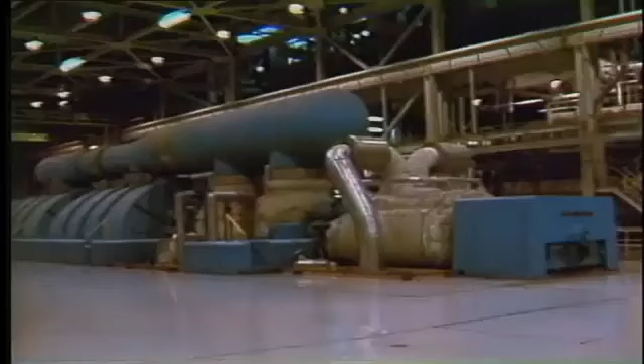So far in this program on steam power, we have examined steam production and the different types of boilers and fossil fuels which are used for this purpose. We are now going to shift the focus onto steam utilization by taking a detailed look at the steam turbine which drives the electrical generator.

We already studied the various turbine cycles and factors affecting efficiency at the beginning of this program. In this module, we'll look at the main features of turbine construction, including the various components and support systems such as gland steam, lube and hydraulic oil, and the condenser. The subject of turbine operation, control, and protection will be dealt with in the next module.

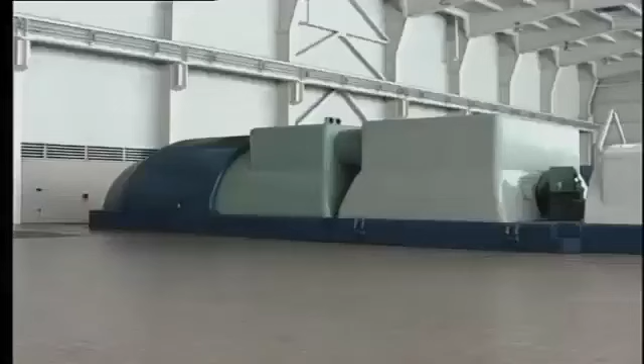The steam turbine is certainly one of the most popular prime movers, especially for driving large power generators. The size of steam turbines built and installed runs all the way from about 5 megawatts up to 1,000 megawatts or more. So what is it that makes the steam turbine the preferred prime mover in comparison with, say, the diesel engine? Well, there are quite a number of advantages, the main factor being that of physical size.

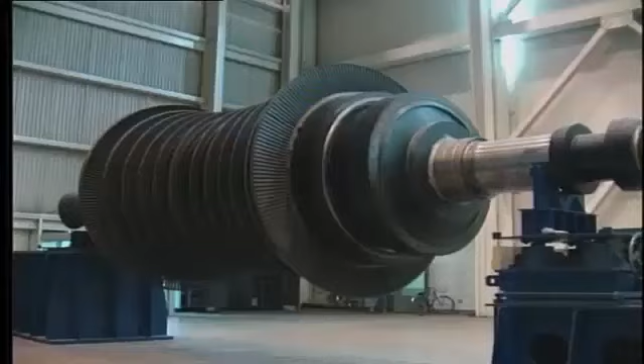For example, a 30-megawatt steam turbine is probably smaller than a 5-megawatt diesel. Another advantage is that the steam turbine is far less complicated and contains very few moving parts. The moving parts are the rotor, which drives the generator, and the steam control valves and control gear.

The amount of vibration produced by a steam turbine generator and transmitted to the surrounding area is relatively low, provided, of course, that the machine is in good condition and is correctly installed and aligned. This makes for a quieter operating plant, particularly when compared with the diesel engine or even the gas turbine.

The steam turbine runs at high speed, usually 3,600 RPM in North America or 3,000 RPM in Europe, and can therefore be coupled directly to a two-pole generator. Remembering that the diesel engine operates at around 200 RPM, we can see one of the reasons why the specific output of the steam turbine is much greater.

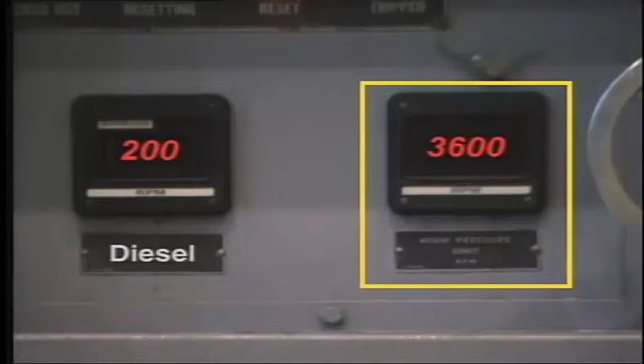One other advantageous factor is the relative ease of controlling the output of the steam turbine. This is achieved simply by adjusting the amount of steam admitted to and flowing through the turbine. As we'll see later, admission valves, also known as control valves, are installed for this purpose.

The turbine stop valve, or valves, is located upstream of the control valves. In case of an emergency, the stop valve closes automatically, cutting off all steam supply to the turbine and bringing the machine to a halt.

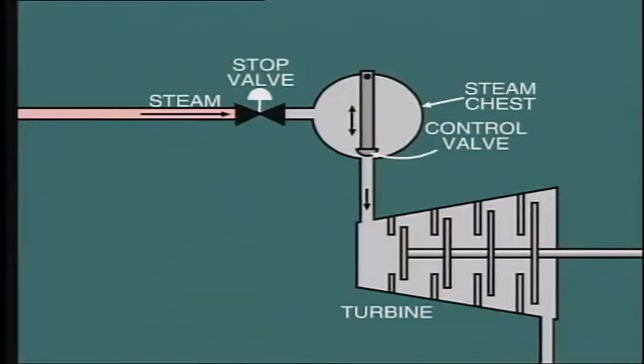The support bearings are allowed restricted movement in the axial plane to cope with expansion of the turbine, as we shall see later.

The turbine rotor is directly coupled to the generator rotor to transfer the mechanical energy produced in the turbine to the generator, where it is converted into electrical energy.

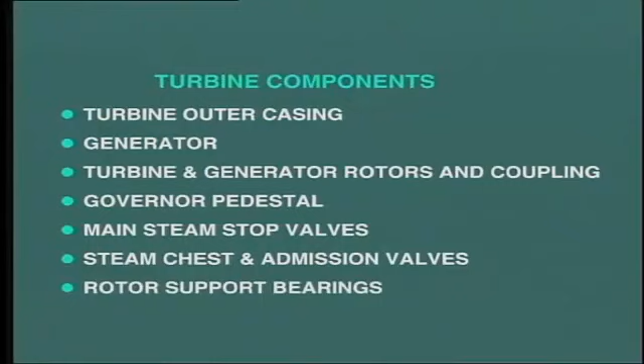Make sure that you know where the following components are located on your particular turbines: the turbine outer casing, the generator, the turbine rotor, the generator rotor, and the associated coupling, the governor pedestal, the main steam stop valves, the steam chest and associated admission valves or control valves, the location of bearings which support the turbine rotor.

Now, the particular machine that we've been studying is made up of several cylinders, and we'll be looking at other cylinder arrangements in a moment.

But first, let's take a closer look at a single cylinder machine in order to help us understand the principles of turbine operation, how it actually functions and produces power.

As we all know, steam at high pressure and temperature, say 1800 psia and 1000 degrees Fahrenheit, is admitted at one end of the turbine.

After passing through the turbine, this steam exits at a much lower pressure and temperature, say 50 psia and 250 degrees Fahrenheit for a typical back pressure turbine.

However, if the turbine is of the condensing type, and this is far more common, then the steam exiting from the turbine will be at a pressure far below atmospheric, say 1 psia, and at a temperature of about 100 degrees Fahrenheit. Clearly, the amount of energy in the steam exhausted from the turbine is much less than in the steam entering the turbine.

The heat energy has been used to force the turbine rotor to rotate at high speed and consequently produce mechanical energy. But how does it do this?

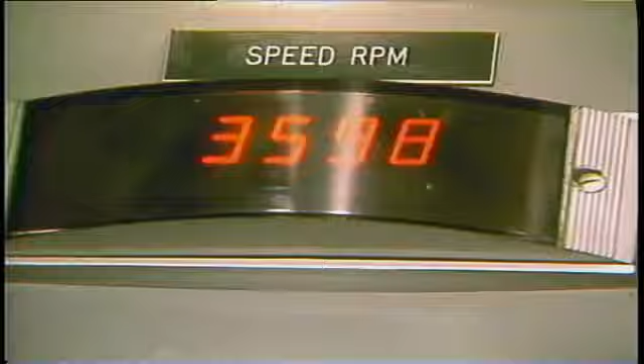Well, the simple answer is that the turbine blades are designed to take advantage of the decrease in steam pressure and consequent increase in steam velocity.

As we know, the heart of the turbine, the bit that makes it work, is the relationship between the fixed and moving blades. The fixed blades guide the steam onto the moving blades.

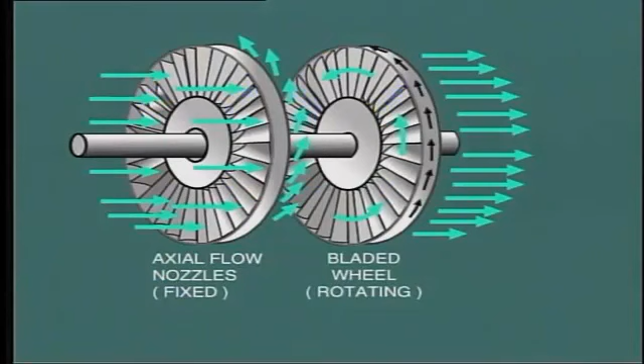As the steam passes through the moving blades, it causes the disc to which they are attached to rotate, and consequently the shaft rotates. Each pair of stationary and associated moving blades are known as one stage.

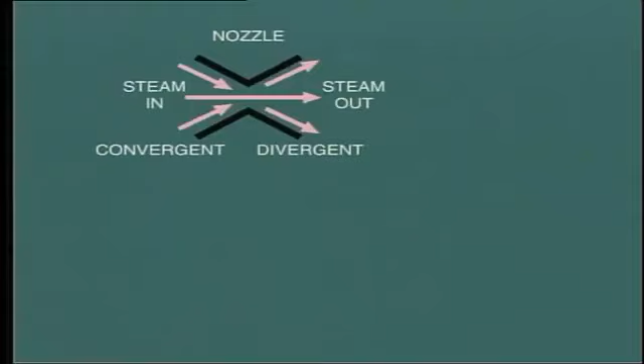Actually, each pair of stationary blades is shaped to form a convergent divergent nozzle. However, the form of the nozzle is bent to receive the steam exiting from the previous moving stage, and then to turn and redirect the steam onto the next moving stage.

Now, before you raise the question, but what about impulse and reaction type blading? Let me say that in practice, when you're operating a turbine, it's not vitally important whether the blading is impulse or reaction. This is really a design and construction feature.

However, it will certainly be worth our while to take a look at this subject, as the type of blading used does affect other structural features. Let's first examine impulse blading.

As the steam passes through the first row of stationary blades or nozzles, its pressure decreases, and as a result, the steam velocity increases. These changes are plotted on this graph.

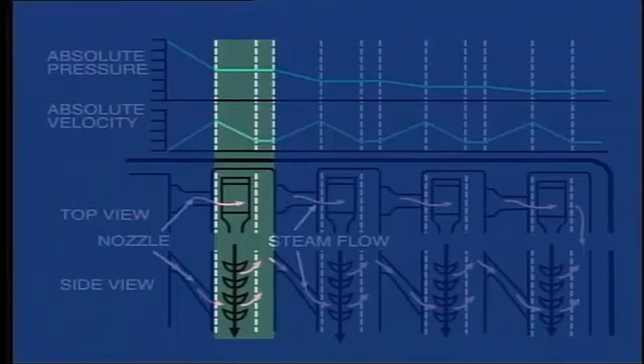As this high-velocity steam is directed onto the moving blade, the impulse pushes the blade forward and consequently produces rotation of the shaft. By the time the steam leaves the moving blade, it has lost much of its velocity, and it then passes on through the next row of stationary blades.

Again, the pressure falls and the velocity increases due to expansion of the steam, and once again this is directed onto the next row of moving blades, and so on.

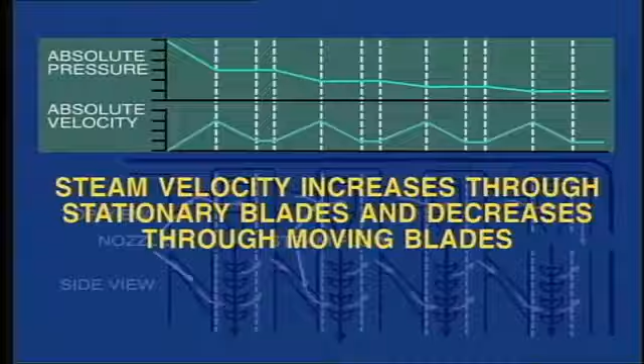We can see that as a result of pressure drop, the velocity of the steam increases each time it passes through a set of stationary blades, but the velocity then decreases as the steam passes through the moving blades and gives up energy. Eventually, when the pressure has fallen to a low value, it can no longer expand and produce work, and it is exhausted from the turbine.

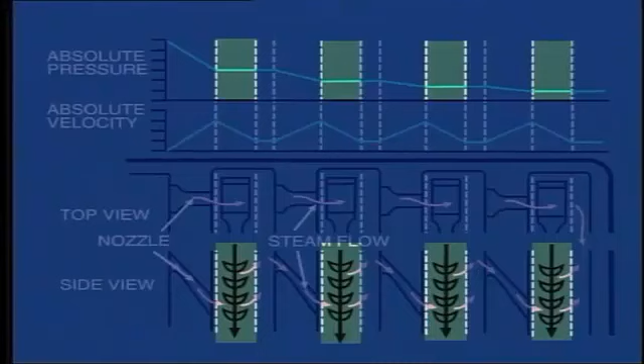But look what happens here to the pressure as the steam passes through the moving blades. It does not decrease, neither does it increase. In fact, the pressure across the moving blades remains the same. It is the change in velocity which actually does the work and provides the energy to drive the turbine.

This feature of impulse blading, that is, constant pressure across the moving stage, brings about a certain constructional advantage. As there is no pressure drop, there is no tendency for steam to leak around the outside circumference of the blades. Because of this feature, we will inevitably find that impulse blading is used in the high-pressure stages of the turbine.

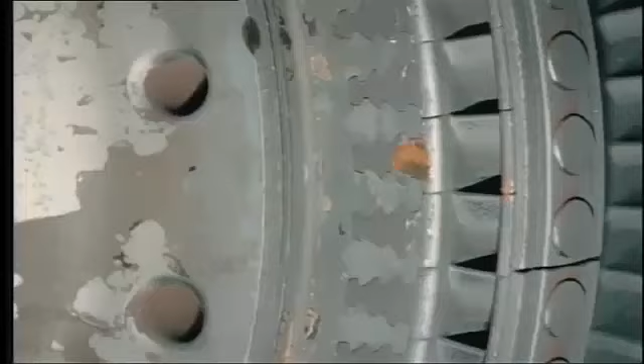In fact, you'll often see large holes bored through the wheel or disc in the higher pressure stages. This is done to ensure that there is no pressure differential across the wheel, and so maintain the correct impulse characteristic of the moving blades.

Now let's move on to look at the characteristics of reaction-type blading. In this case, the mechanical force on the blade is caused by reaction as the jet of steam exits from the blade. This is the same concept as a jet engine.

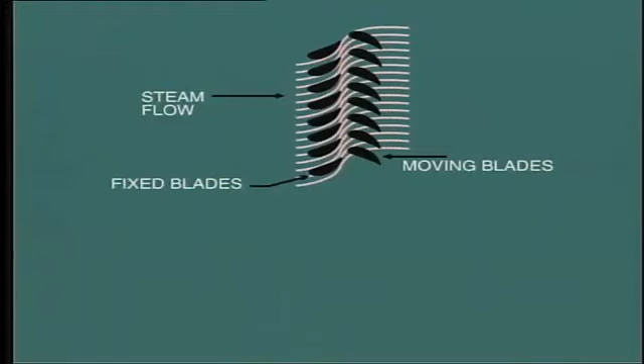With this type of blading, the moving blades are shaped in the same manner as the fixed blade, that is, in the profile of a curved nozzle. This causes the steam pressure to fall as it passes through the moving blade, resulting in an expansion of the steam and an increase in its velocity relative to the blade, causing a powerful jet action.

As before, the exiting steam then passes into the next stage of fixed blades, where it is again expanded and redirected to enter the next set of moving blades. So you can see that in this type of blading, the pressure decreases as the steam passes through both the moving blades and the stationary blading.

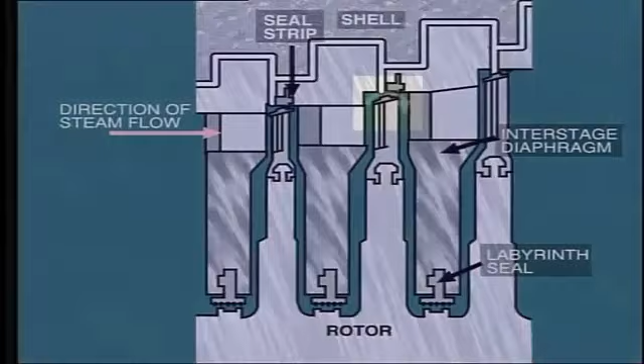Although the reaction turbine is efficient in its use of heat, there is always the potential for some losses due to steam leaking around the periphery of the moving blades, especially in the high-pressure section. In order to reduce this tendency, a reaction turbine will normally have many more stages so that the pressure drop in each stage is lower.

Consequently, the machine will be physically longer. In practice, a compromise is reached, and today most turbines combine both types, using impulse blading in the high-pressure stages and reaction blading in the low-pressure stages.

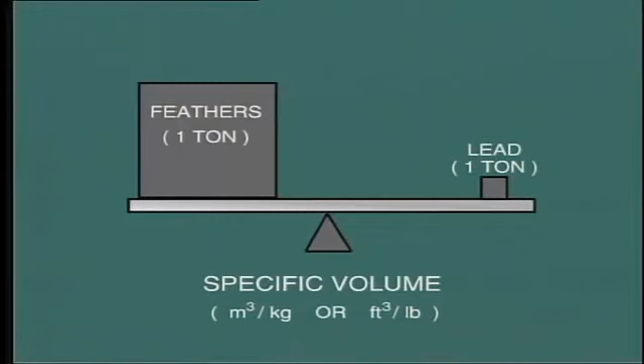In other words, the specific volume of feathers in cubic meters per kilogram or cubic feet per pound is much greater than that of lead. This problem of specific volume is of concern to us when we consider the steam passing through the turbine.

1 pound of steam at 2,500 psia and 1,050 degrees Fahrenheit occupies a space of 1/3 of a cubic foot. At 500 psia and 500 degrees Fahrenheit, the specific volume is 1 cubic foot. At atmospheric conditions, the volume occupied by 1 pound of steam is 27 cubic feet.

And in the case of a condensing turbine, where we have steam exhausting at, say, 1 psia, the specific volume is 333 cubic feet per pound.

So one clear consequence of this is that we have to make the casing continuously bigger as we move from the high pressure to the low pressure end. This is very evident to the eye when we look at this single cylinder turbine.

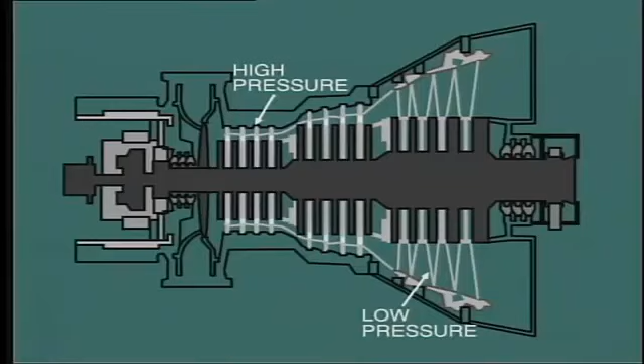But notice, it is not only the casing that must be made bigger, but the turbine blades must also be larger in order to utilize this low pressure steam.

On turbines of high output, say above 100 megawatts, it becomes physically difficult to make the cylinder large enough to accommodate all of the low pressure steam. To get over this problem, multi-cylinder arrangements are used, and let's look at some of these arrangements.

Here we see a common arrangement of two cylinders which may be used for units of up to about 150 megawatts. Crossover pipes are used to connect the exhaust from the high-pressure cylinder to the inlet of the low-pressure cylinder.

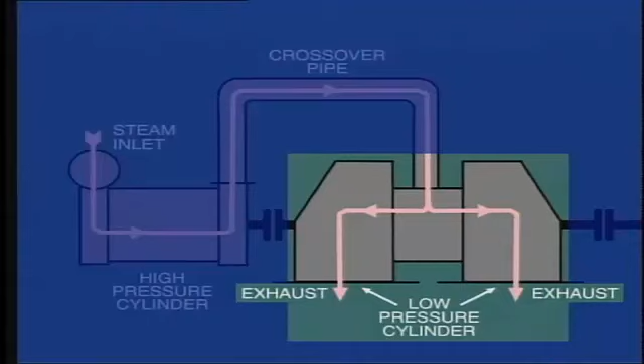Most low-pressure cylinders are of the double flow type, where steam enters at the center and flows outwards in opposite directions. This provides some balance to the thrust and tends to keep the shaft centered.

As the steam path of the high-pressure and low-pressure cylinders is in series, all of the control is carried out at the steam inlet admission valves at the high-pressure end.

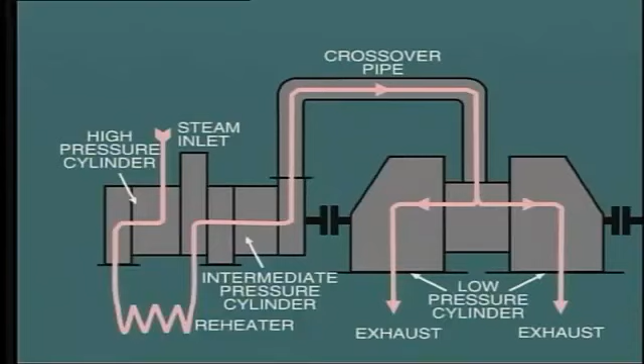The next development from this two-cylinder arrangement introduces reheat and the addition of the intermediate pressure stage of the turbine. A very common arrangement for reheat turbines up to about 250 megawatts is shown here. The high-pressure and intermediate pressure cylinders are combined in one casing, but the steam path is quite separate. The concept of counterflow is also used here, with steam flowing through the high-pressure cylinder in the opposite direction to that of the intermediate pressure cylinder, to help produce a balanced thrust.

As turbines become bigger and bigger, it is necessary to add further cylinders, and the arrangement shown here is typical for machines in the 500 to 600 megawatt range. We have separate high-pressure and intermediate pressure cylinders, and it has become necessary to add a further low-pressure cylinder in order to handle the high volume of steam.

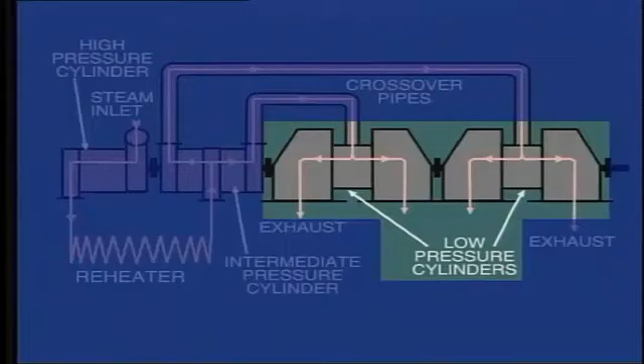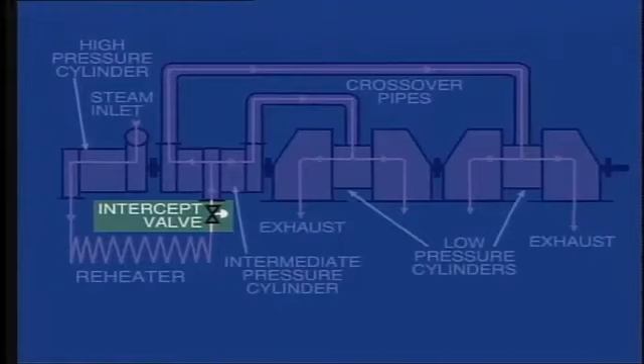With all of the configurations shown, the general control of steam flow through the turbine is achieved by adjusting the admission valves at the high-pressure inlet. However, with reheat units, additional control valves, known as intercept valves, are fitted at the inlet to the intermediate pressure cylinder for protection purposes. We'll be discussing this in detail when we look at control and protection in the next module in this series.

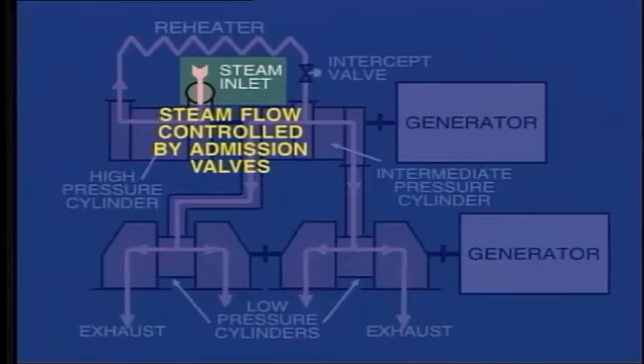Again, the steam flow through the combined turbine is controlled at the high-pressure inlet, thus controlling the output of both generators. The large reheat units we have been considering would typically be found in central power stations of large utility companies.

More recent installations, particularly in industrial situations, are likely to be smaller units, probably within the range of 60 to 150 megawatts. In order to examine some of the basic construction features, let's take a look at this single-cylinder machine.

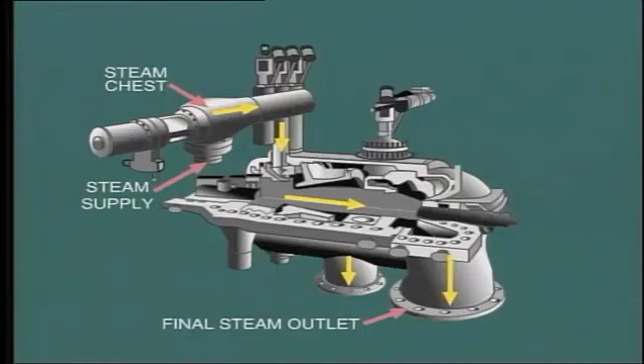Steam is supplied to the steam chest from the boiler after passing through the turbine stop valve. The amount of steam passing through the turbine is regulated by adjustment of steam admission valves. This in turn controls the output of the turbine and the coupled generator.

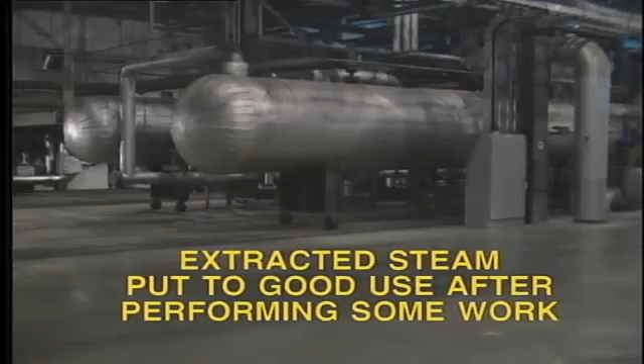At various stages along the steam path, steam is extracted from the turbine. This extraction steam is commonly used for feed water heating, but there may be other applications as well. The concept is that the extracted steam is put to good use after performing some work in the turbine. You will remember we discussed this in the first tape in this series when we looked at efficiency.

The turbine rotor is supported on journal bearings which are located at each end of the cylinder. It is essential that these bearings retain their correct alignment, as the clearances between the rotating parts and the fixed parts of the machine are extremely small.

A thrust bearing is located along with the journal bearing at the governor pedestal in order to locate the shaft and prevent movement in the axial direction. What do we mean by this? Well, in this single-cylinder arrangement, the flow of steam through the turbine tends to push the rotor towards the generator. If this thrust was not contained, the rotating blades could conceivably come into contact with the stationary blades of the next stage and cause quite a catastrophe.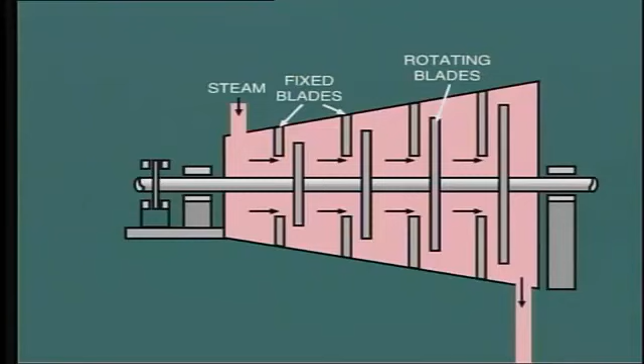To prevent this occurrence, a fixed collar on the shaft is held in position by lubricated thrust pads. During construction and maintenance of the machine, these pads are carefully set to ensure that the correct clearances exist between rotating and stationary parts. Allowance must be made for the casing to expand as it becomes heated by the steam flow.

In a single-cylinder machine like this, the normal method is to anchor the machine solidly at the low-pressure end, that is, at the turbine exhaust, and allow the front-end pedestal to move forwards. In large machines, the expansion in this longitudinal direction may be over 1 inch, that is, 25 millimeters.

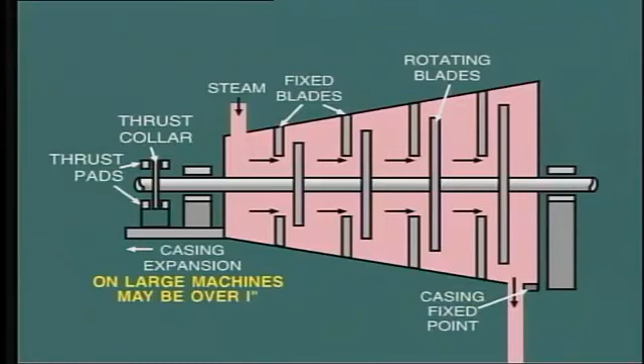In this particular machine, the pedestal is fixed to a flexible support which allows the movement to take place. A more common arrangement on larger machines is to fit the base of the pedestal with sliding feet to allow free movement in the axial direction.

Now let's take a close look at a typical rotor. Moving from the front end to the rear, we see first the thrust collar, which bears against the thrust pads during operation. Just ahead of this, there is the portion of the shaft which sits in the journal bearing. This area should be perfectly smooth with no indentations or marks.

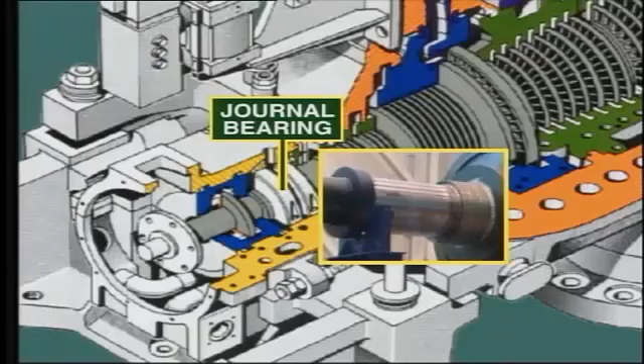Moving further along, we come to the gland seals, which are needed to reduce steam leakage along the shaft. We'll be talking about this arrangement in more detail later.

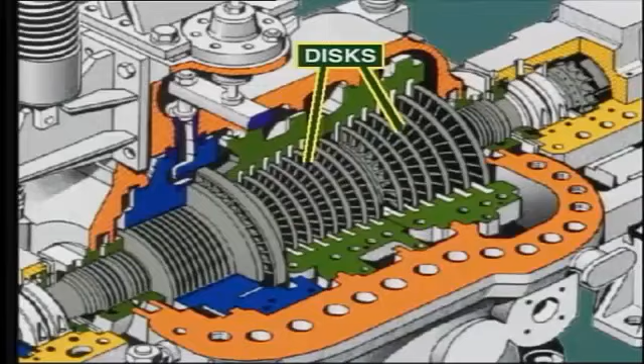We now come to the series of wheels, or discs as they are known, which extend along the length of the shaft. Blades are fitted all around the periphery of the discs and are held firmly in place at the roots. On many machines, further support is provided by fitting rings or shrouds around the outside of the blading. Note the much larger size of the low-pressure blades in order to handle the increased volume of steam at this end.

Now, continuing our examination along the length of the rotor, we come to the low-pressure end gland seal. This is at the interface between the casing and the rotor. Just on the outside of the casing is fitted the low-pressure end journal bearing.

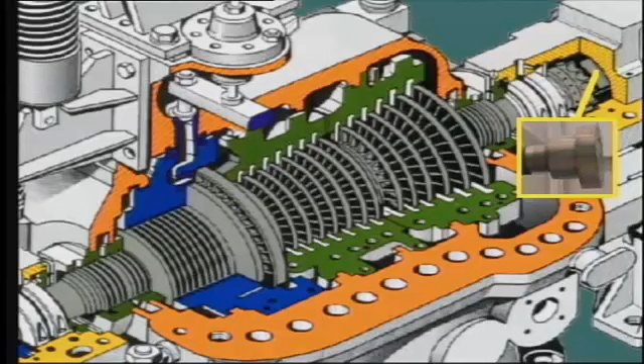At the very end of the shaft, we find the coupling, which is used to join the turbine and generator rotors. In addition, at this end of the shaft, we will often find a large gear drive, which engages with the turning gear.

As we'll see later, the turning gear allows us to rotate the rotor at very low speed, say 1 RPM, without having steam pass through the machine. This is used during shutdown to ensure even cooling and so prevent distortion of the rotor.

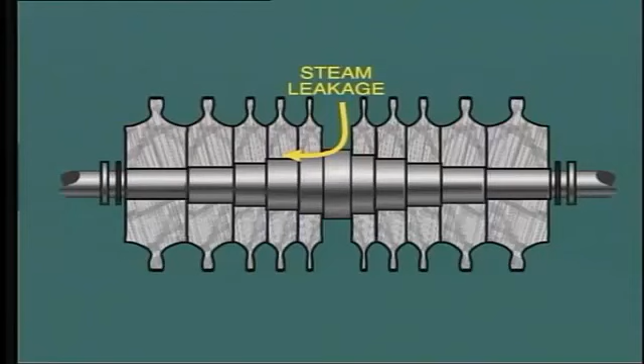More about this later. In earlier machines, the discs are shrunk onto the rotor shaft. A problem with this type of construction is that in some cases, steam may leak along the shaft and cause distortion due to differential heating as well as a loss of efficiency.

To overcome this problem, in modern turbines, the discs and the shaft are forged in one piece and then machined. Yet another method of building up the rotor is by welding discs together and so eliminating the shaft.

Now remember that in between each disc and associated blades, we have to fit the stationary blades. Let's see how these are held in place.

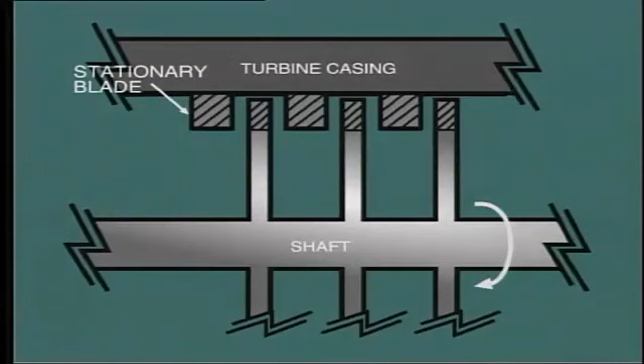The first time we examine a turbine, we might imagine that these stationary blades could be fixed to the outer casing to line up with the moving blades, like this. But we do have a problem with this arrangement. What is there to stop the steam passing around the blade instead of through it?

In order to prevent this, a shield known as a diaphragm is constructed extending all the way from the inner diameter of the stationary blade down to the shaft, leaving a small clearance to allow rotation. In practice, the stationary blades are inserted into the diaphragm like this, and the diaphragm itself is fixed into the turbine casing.

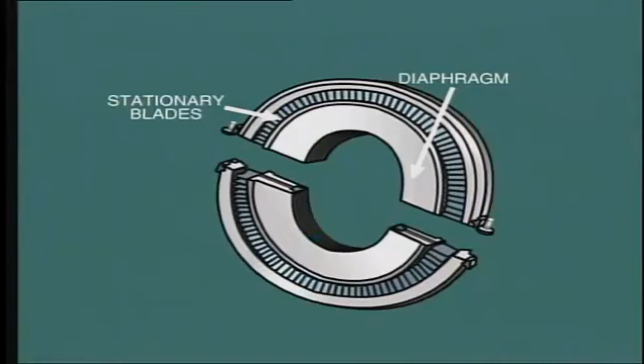Seal strips are fitted at this location to prevent steam leakage. After all, we want all steam to pass through the blading, not around it. And we'll be talking about steam seals later.

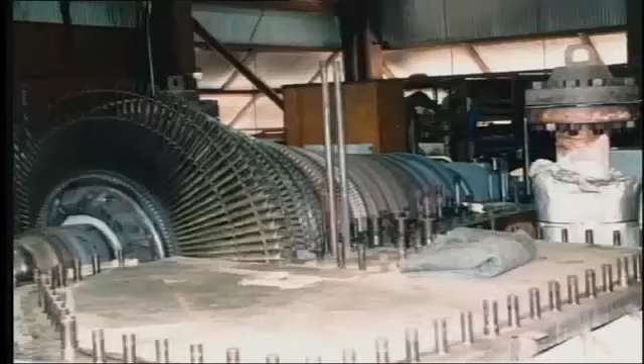When the turbine is assembled, the rotor must be very carefully lowered into place so that the discs fit perfectly between the respective diaphragms. Once the rotor is in place, the axial clearance can be adjusted and finally fixed in place at the thrust bearing.

Similarly, the journal bearings must be adjusted to provide correct alignment with the generator rotor. When all adjustments are complete, the top half of the casing, which is a mirror image of the bottom part, is very carefully lowered into place and finally bolted down.

The exterior of the turbine casing must be very well insulated to prevent heat loss. With temperatures at the high pressure end in the region of 1,000 degrees Fahrenheit, we could suffer a considerable loss of efficiency as well as an uncomfortable turbine room if the insulation was inadequate.

Now, in this segment, we've looked at general features of turbine construction. Using this information as a guide, make sure that you check and learn the structural features of your own turbines.

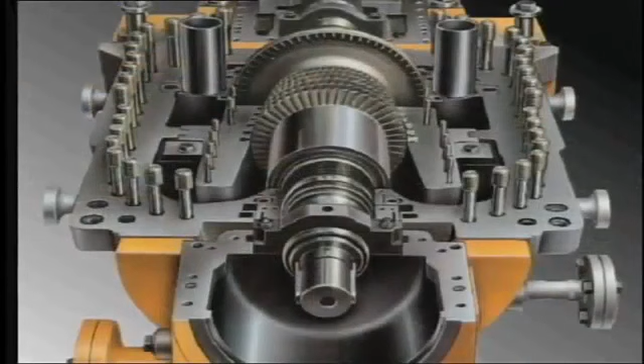We've mentioned several times the terms gland seals and steam sealing strips. It's time for us to take a closer look at these. When we consider that the rotor is turning at high speed, it is obvious that some clearance must be provided for the shaft as it protrudes from the stationary casing at each end of the turbine.

There is very hot steam at substantial pressure inside the casing at the high pressure end of the machine, so there is potential for a considerable amount of this hot steam to leak out through the space between the rotating shaft and the casing. Would we not have the same condition at the low pressure end? Well, yes, if this is a back pressure turbine with a positive exhaust pressure at, say, 50 psi or over. Although the pressure and temperature is less, there would still be leakage between the casing and the rotating shaft.

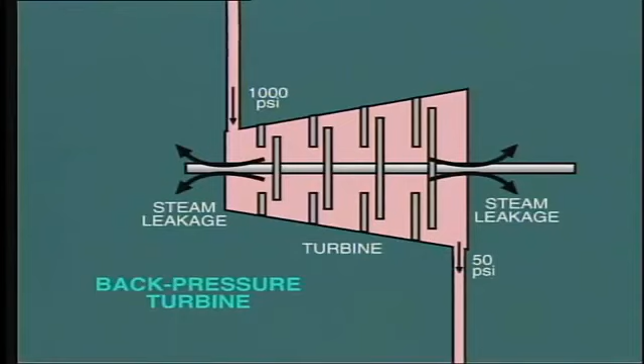But what about the case of a condensing turbine? Well, in this situation, there is a vacuum inside the casing at the low pressure end. So instead of steam leaking out, air would leak in, and we do not like that either. It could lead to a loss of vacuum and consequent loss of efficiency.

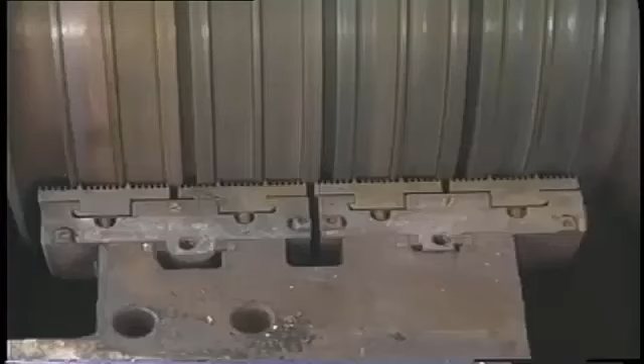In order to reduce this leakage as far as possible, gland seals are located at each end of the casing. The aim of the seal is to provide a high resistance to the flow of steam or air. This is achieved by the use of a labyrinth seal. The rotating portion on the shaft is slotted like this, while the stationary portion consists of thin metallic strips which are pressed into the rotating grooves by very light spring pressure. The resultant labyrinth path considerably reduces the leakage of steam out or air in.

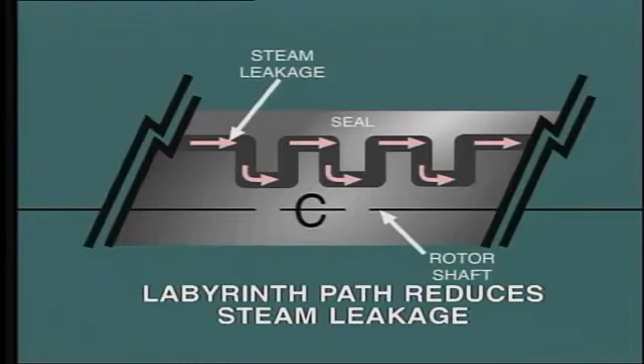Even so, there will still be some leakage of steam at the high pressure end through the gland seal. This leakage steam is extracted from the gland and fed into a low-pressure extraction point. The leak-off valve automatically adjusts the pressure within the gland steam header to maintain approximately 5 psig. But even at that low pressure, there will still be some leakage along the shaft into the turbine room.

In order to prevent this steam from getting into the turbine room, it is drawn from the outside of the gland seal by a slight vacuum, which is produced by the gland steam exhauster. Some heat is recovered from this small amount of steam by passing it through a heat exchanger in the condensate system known as the gland steam condenser.

Now let's see what's happening at the vacuum end of the turbine. Well, we definitely do not want air to enter the casing, even the small amount that may flow across the labyrinth seal. In order to prevent the leakage of air into the casing, low-pressure steam is provided from the header to the low-pressure gland seal. This results in a small amount of steam entering the turbine casing, and this is far preferable to air.

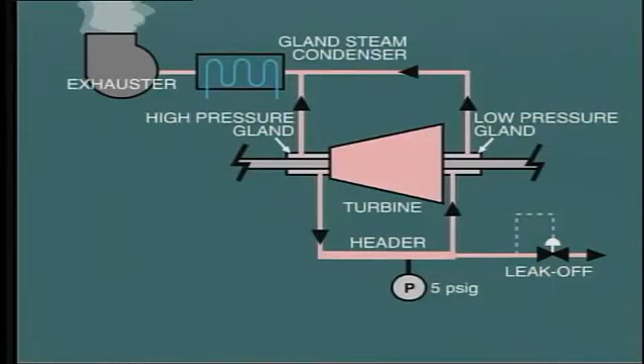Of course, some of the steam will also try to pass along the shaft in the opposite direction to atmosphere. But this is captured by the gland steam exhauster in the same manner as for the high-pressure gland seal. So we can see that leak-off steam from the high-pressure end is useful in providing sealing steam at the low-pressure end. As the load changes, the leak-off valve opening adjusts to maintain the appropriate header pressure.

But how does the system work when we're preparing for startup? In this situation, we need to pull a vacuum in the turbine and condenser before admitting any steam into the turbine. So in this condition, we have no leak-off steam. Instead, live steam is supplied to the gland steam header. The live steam supply valve is set to control the header pressure at about 3 psi to coordinate its operation with the leak-off valve.

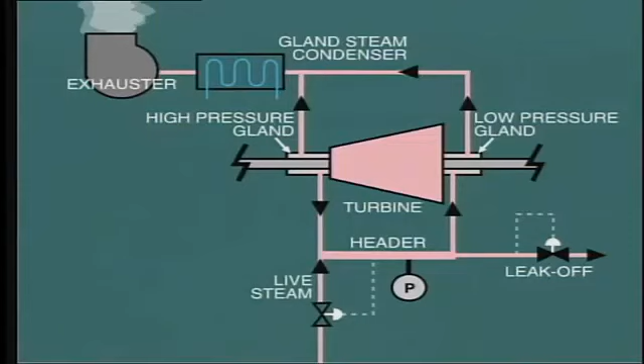When the turbine comes on load, the leak-off steam from the high-pressure gland feeds into the header and so raises its pressure. When the pressure gets to 3 psi, the live steam supply valve will close. When the pressure rises to 5 psi, the leak-off valve will open enough to maintain this pressure.

Remember that there are two basic circuits in the gland steam seal system. First, the gland steam header, which supplies steam to the seals or dumps excess steam. The second circuit extracts leakage steam from the extremities of the glands and passes it through a heat exchanger and the gland steam exhauster. Make sure to check and learn the details of your own gland steam system.

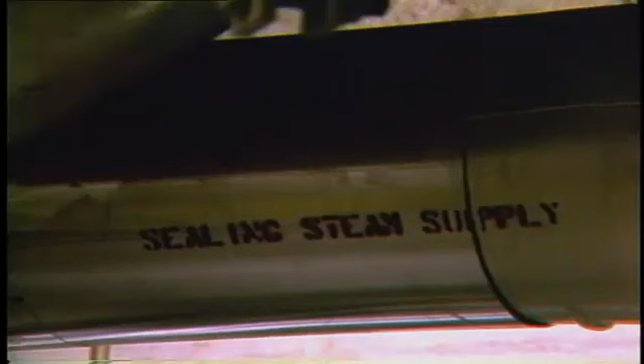Sealing strips are similarly used in other parts of the turbine where we need to eliminate or at least reduce steam leakage. A typical example is the interstage seals, fitted at the inner circumference of the diaphragms where the shaft rotates. In all cases, the seal strips are made of very thin, soft, metallic material. They rub on the shaft and reduce the leakage as much as possible.

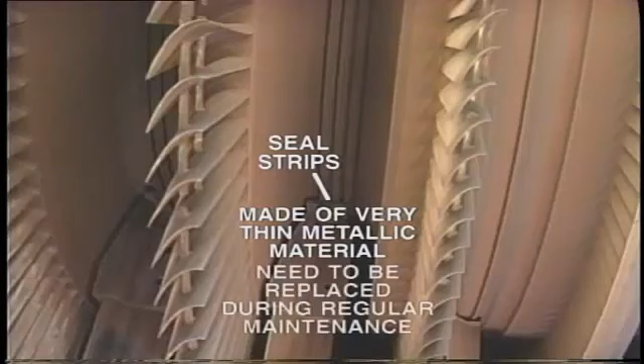Of course, as time passes, the sealing strips wear and need to be replaced during regular maintenance. We'll be discussing this aspect in another module in this series. Well, so much for sealing systems.

Another very important support system essential for turbine operation is that of lube oil and hydraulic oil supply. Let's look at the lubricating oil system first. A continuous flow of lube oil must be circulated through all of the turbine and generator bearings.

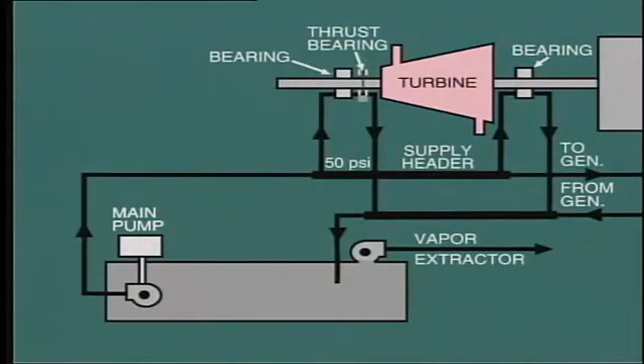Typically, the arrangement would look like this for a single-cylinder machine. The lube oil supply header is maintained at about 50 psi, and from here the oil is force-fed through each of the bearings, including the turbine thrust bearing. After passing through the bearings, the oil flows into the return header, and from there to the lube oil tank. The lube oil is pumped from this tank in order to feed the supply header. So we have, in effect, a closed cycle.

But there are some other important features. First, the need for cooling. As the lube oil passes through the bearings, it picks up heat and its temperature rises, conducting heat away from the bearings. The effect of this would be to continuously raise the temperature of the oil in the tank.

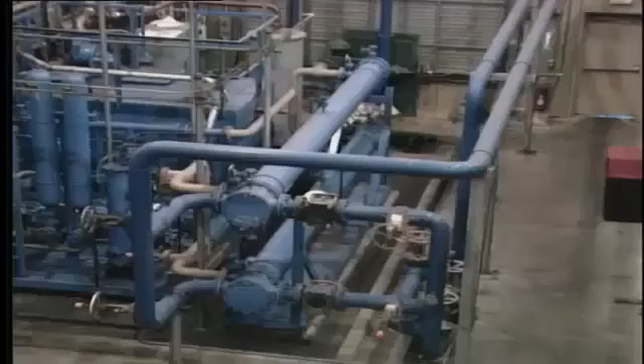In order to prevent this, a cooler is provided, usually placed in the path of the lube oil supply. The lube oil cooler is usually of the tube and shell type, with cooling water passing through the inside of the tubes. It is normal to fit two coolers so that one may be taken out of service for cleaning at any time. Thus, the change can be accomplished without interrupting the supply of oil.

Actually, the raising of lube oil temperature in the tank has a slight advantage in that it allows any moisture contained in the oil to vaporize. For this reason, a vapor extractor is fitted to the top of the tank to draw off any vapor and discharge it to atmosphere. But where does the moisture come from? Well, this may be picked up by the oil in its passage through the bearings, with their proximity to the gland steam. The vapor extractor will also remove any traces of hydrogen that may infiltrate the lube oil from the generator cooling system.

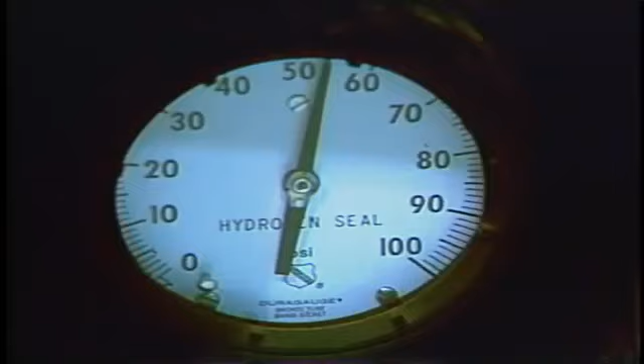The subject of hydrogen cooling and its associated seal oil system is discussed in the power generation module of this program. More seriously yet, the oil is likely to pick up fine pieces of metal and other contaminants in its route through the system, and these contaminants could cause serious damage to the bearings and therefore must be removed.

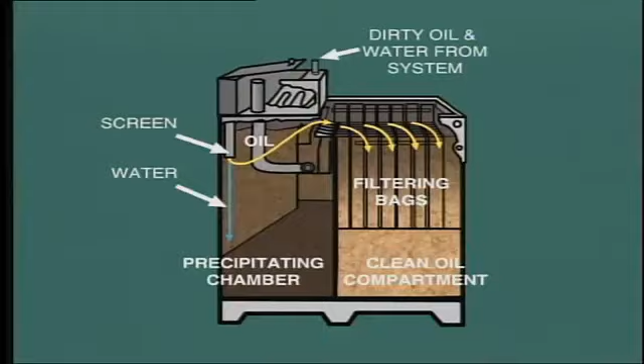Most lube oil systems include a filtering system within the circuit. This may consist of bag-type filters within the oil tank, or external cartridge filters, or a centrifuge which continuously circulates oil from and back to the tank. Maintaining the cleanliness and purity of the oil is extremely important to good turbine operation. Usually, the lube oil is sampled at regular intervals, say monthly or bi-monthly, and analyzed for impurities and other characteristics.

The supply of lube oil is so vital to the operation of the turbine and generator that a standby pump must always be provided and maintained ready for startup on automatic control. But one question comes to mind: what would happen if we lost all auxiliary AC power? This could happen, for example, in the case of a turbine generator trip in a facility with no station service backup. We'd then be faced with the prospect of the turbine generator running down without circulation of lube oil, a condition that could conceivably damage all of the bearings. In order to prevent this potential disaster, many machines are equipped with a DC oil pump, which would be fed from the station battery in such an emergency.

Now let's move on to look at the hydraulic oil system. This system operates at a much higher pressure than the lube oil system, even as high as 2,000 psi in some machines. Fireproof synthetic oil is often used as a safety feature. But what is the purpose of this hydraulic system?

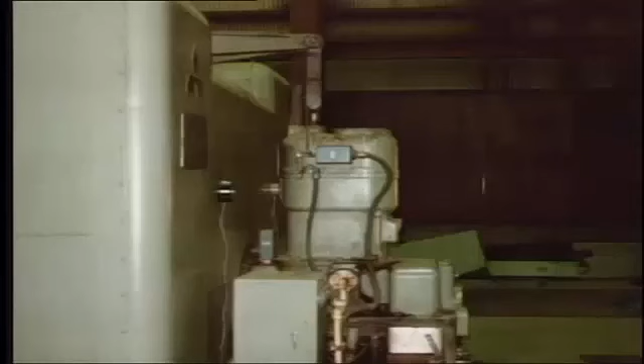The high-pressure oil is used as the medium for operating the turbine control system. For example, the servo mechanism, which provides the force to adjust the turbine admission valves, is motivated by hydraulic oil, hence the high pressure needed. Hydraulic oil is also used to hold open the turbine stop valve during operation and hold open the extraction line non-return valves during normal operation.

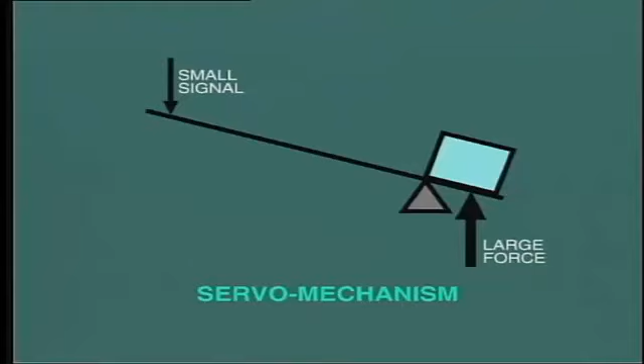Hydraulic oil is employed to provide a relatively large force in response to a small signal from the control system. For example, the servo mechanism we just mentioned is really a power amplifier that responds to a small movement and force of, say, a few pounds from the governor system, and turns this into a force of several tons to operate the turbine valves against the high-pressure steam.

In this simplified example shown here, the turbine steam control valve is adjusted by the position of the hydraulic servo piston. This large system is controlled by the small pilot valve here.

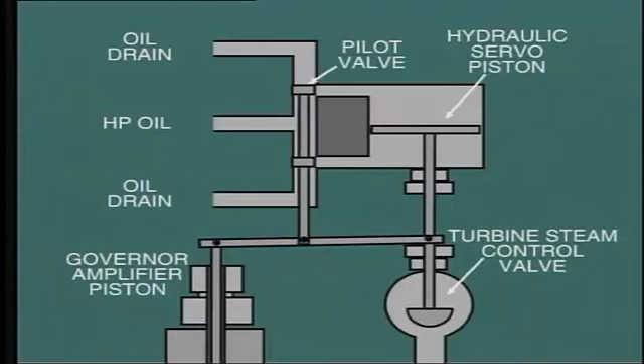Now, suppose the governor control system lifts the operating lever slightly. This will now allow high-pressure oil to enter the servo cylinder above the piston. At the same time, it will allow oil below the piston to pass to the oil drain. In response, the piston will be forced downwards, partially closing the control valve. But this movement downward also moves the operating lever, and this moves the pilot valve downward, closing off the servo cylinder, which is now in a new position.

We'll be looking in much more detail at the turbine control system in the next module in this series. For now, we're just looking at applications for hydraulic oil.

In many turbines, the same grade of oil is used for both applications, so the hydraulic and lube oil systems are combined to utilize the same oil tank and the same pumps. The main oil pump is mounted in the front end pedestal and is driven directly from the turbine shaft.

During startup and shutdown, a motor-driven high-pressure oil pump is used. Again, this supplies both the hydraulic oil system and the lube oil system. In this arrangement, this pump is known as the auxiliary oil pump since it is the main standby to the shaft-driven pump.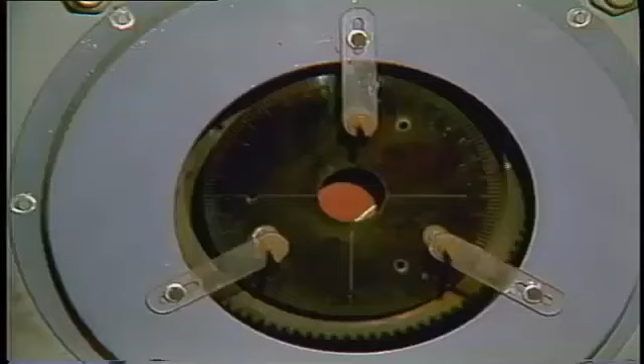When the turbine is out of service and operating on turning gear, we still need to provide lubrication to the bearings. However, in this situation, with hydraulic oil not required, it would be inefficient to run the large auxiliary oil pump. Instead, a small pump is installed known as the turning gear oil pump, and this provides sufficient oil for lubrication only. And as before, there is a DC emergency pump which will provide lubrication in case all AC service supply power is lost.

So we can see that there is in fact a hierarchy of oil pumps with automatic startup based on pressure readings. If the high pressure oil pump fails and the pressure falls, the AC auxiliary oil pump will cut in automatically. If the lube oil pressure falls, the turning gear oil pump starts up automatically. And if this consequently fails, the DC oil pump will start.

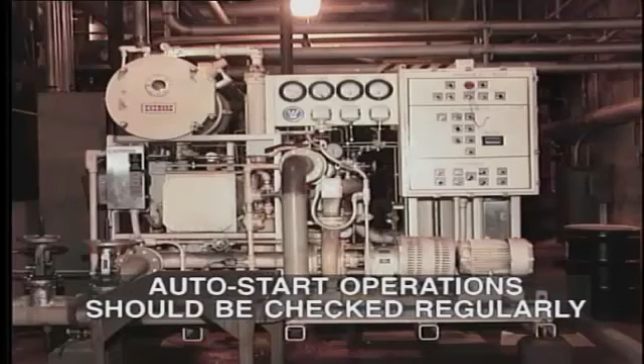As with all automatic devices, the pump auto start operations should be checked on all pumps regularly. Make sure that you check out the details of your own lube oil and hydraulic oil systems. You should be thoroughly familiar with the location of all pumps and controls for these pumps.

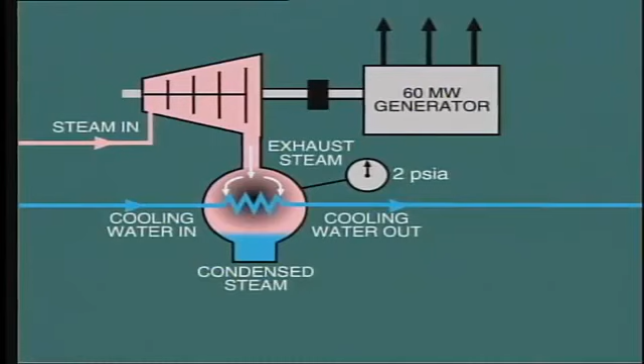The dramatic change in volume from steam to water leaves a large empty space, and as the condenser is a closed vessel, the result is a vacuum. The actual pressure in the steam space of the condenser, and correspondingly at the turbine exhaust, will be about 1 to 2 psia, depending on actual local conditions.

The steam space in the condenser is filled with low-pressure steam exhausted from the turbine, which quickly turns to water droplets as it comes into contact with the outside surface of the cooling tubes. Most condensers contain several thousand tubes about 1 inch in diameter, usually made of non-corrosive metals such as cupronickel, brass, and even stainless steel.

Cooling water passes through the inside of these tubes, while steam condenses on the outside. This so-called condensate then falls to the bottom of the condenser, where it is collected in a vessel known as the hot well. From here, the condensate is removed by the condensate pump and circulated back to the system.

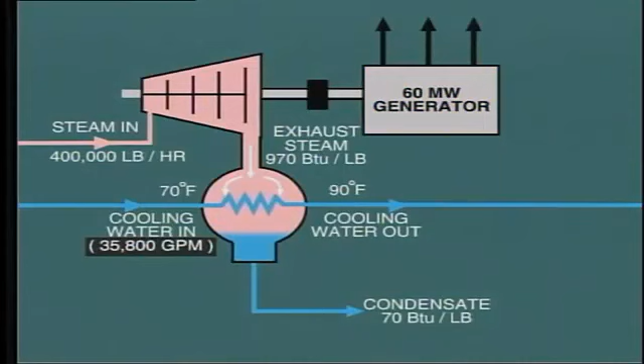In order to condense steam into water, all of the latent heat must be removed, that is about 970 BTU per pound. To achieve this, a very large quantity of cooling water is required. For example, a 60 megawatt unit may require as much as 35,800 GPM of cooling water to pass through the condenser.

Such a large quantity of water cannot be supplied by a water treatment system. Therefore, the condenser cooling water, or circulating water as it is known, is normally taken from a nearby river, lake, or even the sea. In some cases, a closed circuit system is installed using a cooling tower. We'll be talking more about the actual circulating water system and its components later in this program. For now, we're concerned with the condenser and other vacuum equipment.

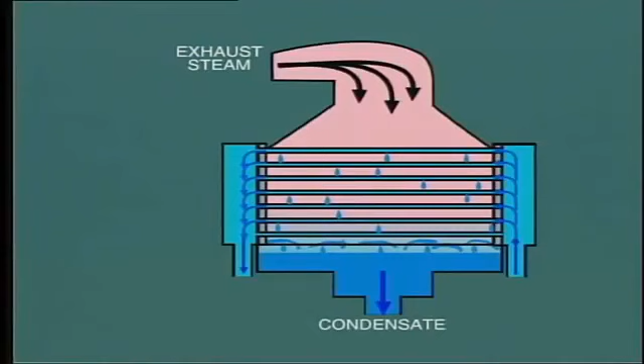In the arrangement shown here, the circulating water enters at one end of the condenser, filling the inlet water box, then passes through the tubes into the outlet water box. From here, the water circulates back to the system. This particular arrangement is known as a single-pass system.

In many installations, a double-pass condenser is used. Here, the water enters at the bottom, passes through the lower tubes, arrives at the far water box, and then is circulated back through the upper set of tubes, exiting from the upper water box.

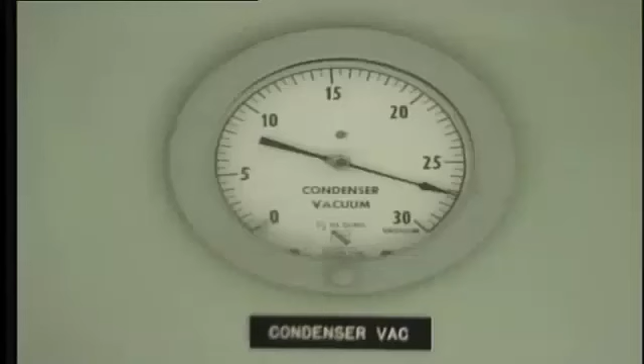Over a period of time, the circulating water may leave some deposits inside the tubes. The consequence of this is a reduction in heat transfer and a rise in the back pressure inside the condenser, resulting in a loss of efficiency and lower output from the turbine. The circulating water may also deposit algae, mussels, and other marine life on the front of the tube plate, reducing the flow of water through the tubes. Again, the result is a loss in cooling and a consequent rise in back pressure.

Generally, the condenser needs to be cleaned manually from time to time, and in most cases this entails shutting down the turbine. There are, however, some machines which are designed to allow one half of the condenser to be cleaned while the other half remains in service, and the unit continues operating at reduced load.

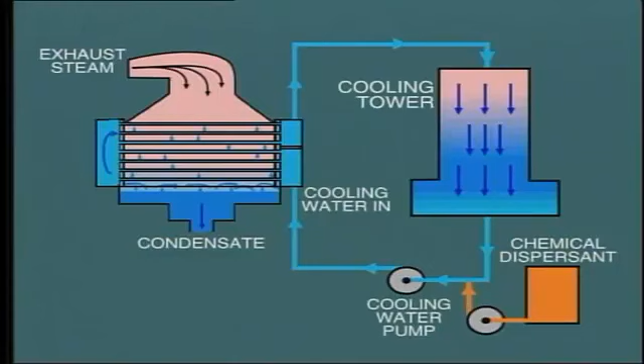In an attempt to maintain a clean condenser, chemical injection is carried out at some installations. Adding a biocide to the circulating water can reduce or eliminate the growth of algae. Sulfuric acid may also be added in some plants where a closed-cycle cooling tower system is used. The objective is to lower the pH slightly to about 6.5 in an attempt to prevent scale forming inside the tubes. Another chemical used on closed-cycle systems acts as a dispersant, with the aim of keeping solids in suspension and preventing deposits from forming on the inside tube surface.

Many condensers are fitted with a siphon connection on top of the water box. The objective of this vacuum connection is to ensure that the water boxes remain completely full of water so that all of the cooling tubes remain effective.

But how could it be otherwise? Well, the circulating water will likely contain air bubbles, which may be released at the top of the water box, forming a large air pocket. In time, as the air pocket increases, the level of the water at the top of the water box falls, and consequently there will be no water flow through some of the tubes.

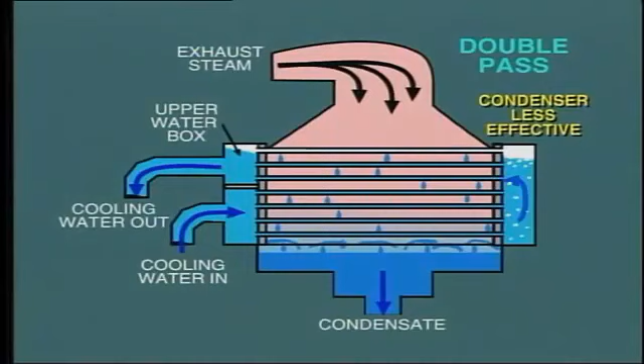The result of this reduction in heat exchange will be that the condenser is less effective and the turbine back pressure increases. The siphon connection prevents this from happening by drawing off the air at the top of the water box and piping this into a vacuum tank.

The vacuum in the tank is maintained at about 25 inches of mercury by small vacuum pumps that are intermittently operated. A water level sensor in the water box operates a control valve on the siphon connection. When the level falls below a set level, the valve opens and air is drawn out, allowing the water level to rise. When the level raises to fill the water box, the control valve closes.

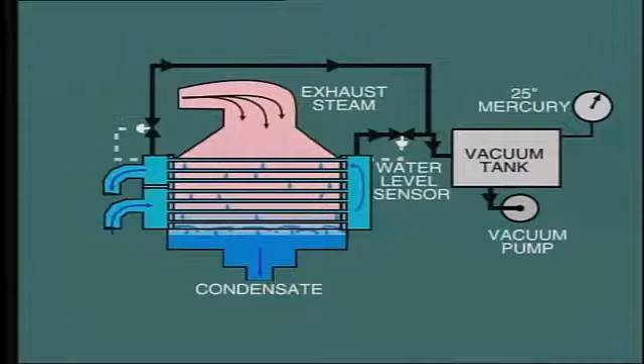The problem of air accumulation may also occur inside the steam space of the condenser. Remember that this area operates under a negative pressure, a vacuum. Therefore, any leakage by valves, piping, or flanges will allow air to leak into the steam space of the condenser instead of steam leaking out.

Also, some incondensable gases, such as oxygen and carbon dioxide, may be released from the steam as it condenses. There is a tendency for these gases, plus any small amount of leakage air, to accumulate inside the steam space and eventually cause the back pressure to rise, reducing turbine efficiency.

In order to remove air and gases from the steam space, vacuum devices are fitted, such as a steam ejector and a vacuum pump. This air removal equipment is connected to a specific location in the condenser known as the air box. In this area, additional cooling tubes are concentrated to ensure that the steam condenses and only air and gases are removed.

In many plants, the discharge from the vacuum equipment is monitored to provide a measure of air leakage into the condenser. During normal operation, this air leakage should be quite small.

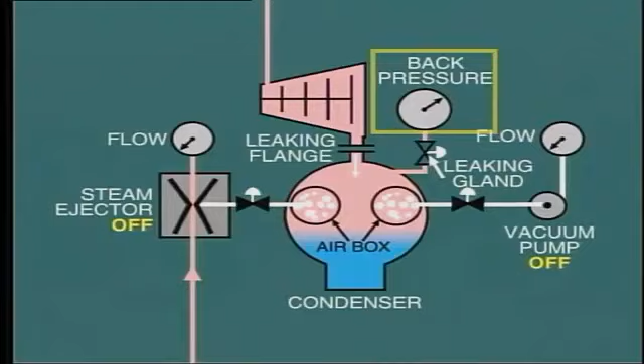Compare this with the change which would take place if all of the circulating water flow were to cease, perhaps due to a trip of the circulating water pumps. In this case, with no condensing taking place at all, the back pressure would rise immediately, and the turbine would have to be tripped. In practice, this takes place automatically, and we'll be discussing this when we look at protection devices in the next module.

So we can see that during normal operation, the vacuum equipment is intended to maintain the vacuum in the condenser, not to create it. However, we also depend upon the vacuum equipment to draw a vacuum before startup.

In this situation, before steam is admitted to the turbine, the condenser and the turbine are full of air. In order to remove this air, the vacuum pump or steam ejector must be placed in service and so pull a vacuum inside the unit.

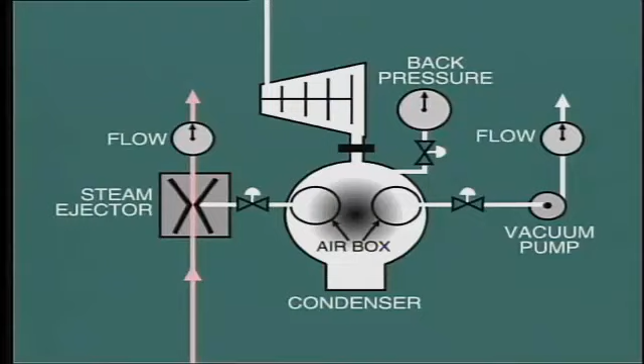Let's see how the steam ejector works. This functions on the principle of the Venturi nozzle, like this. When high-velocity steam passes through this nozzle, it creates a vacuum at this convergent point.

This is the point which is connected to the air box in the condenser. The air enters the nozzle and is mixed with the steam passing through. On a startup ejector, also known as a hogging ejector, this mixture is discharged to atmosphere.

However, the requirement for air removal when the turbine is in service is much less. Therefore, the on-load ejector uses smaller nozzles and has some heat and steam recovery.

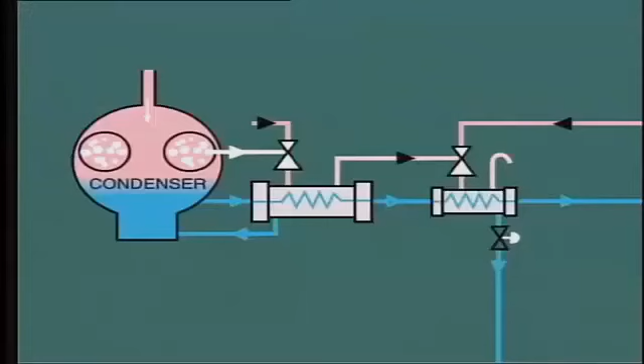As before, air is drawn from the condenser by the primary ejector, and the air and steam mixture discharges into a heat exchanger to condense the steam. The cooling medium is usually condensate, so all of the heat is retained within the cycle from the intercooler.

The air is now drawn into a second stage ejector, which is at quite low pressure, that is, a modest vacuum. From here, the air and a small amount of steam is exhausted to atmosphere.

The creation and maintenance of vacuum in the condenser is an exceedingly important part of turbine operation. And we'll be looking at this in more detail in the next module in this series, when we focus our attention on turbine operation and control.